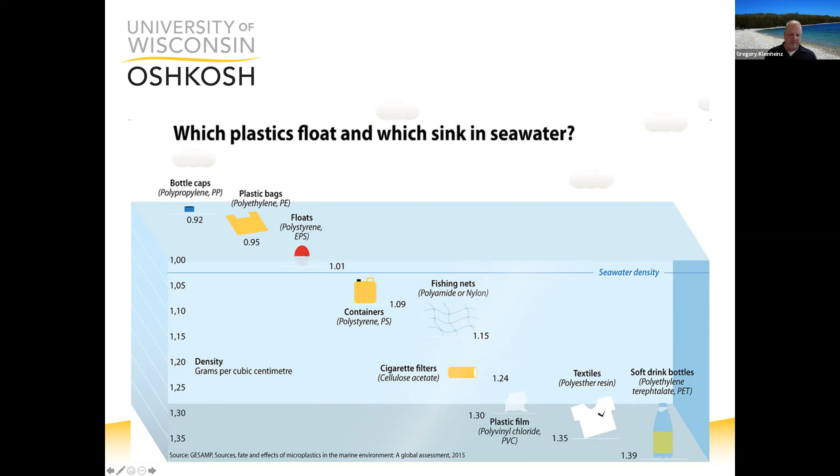Here's seawater, a little over 1, but anything in this area up here, hopefully you can see that, those are the things we see floating. But then a lot of these other materials, even though they're more dense, don't just sink right to the bottom. They're usually floating in some way.

All this bulk plastic then turns, or not all of it, but a lot of it, into what we call secondary microplastics. So we have primary microplastics, things like beads and other emulsifiers that were put into home care products. But a lot of these larger things turn into secondary microplastics, things that break down photochemically, physically, and through freeze-thaw. These are then present in not very visible ways. It's not a water bottle floating.

It's something else. And there's also some other places that we don't always think of it. For example, a nice fleece jacket like this might be made from 22 liter bottles, right? And everybody says, oh, look at the great way of recycling that, which is all true. But it also sheds a tremendous amount of fibers, these small microplastic pieces, and anything that's really 5 millimeters or smaller is considered micro. Those things end up in the water.

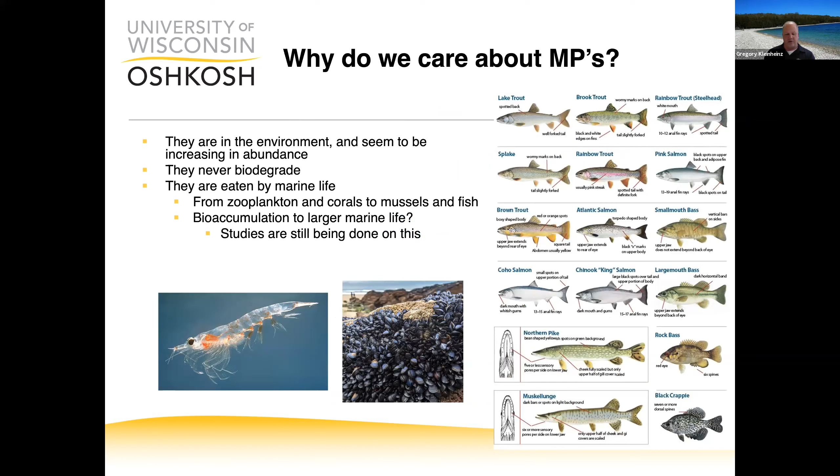You can kind of go on and on about what these microplastics may or may not do, and a lot of it we don't completely understand. We understand they're aesthetically not pleasing. These are plastic, completely synthetic materials that things including humans are ingesting, so it's probably not a good thing, but we really don't understand completely what happens.

We started last year really looking into this, over the last couple of years. In 2019, Adopt a Beach found that 90% of the material they're picking up was plastic, at least partially or fully. It's been estimated 22 million pounds of plastic is deposited in the Great Lakes each year. I found that number astounding when I first heard it, because we've all seen those large gyres of plastic in the news floating around the Indian Ocean or Pacific Ocean, but 22 million pounds every year is a big number for the Great Lakes.

So hopefully we're not at risk of looking that way as well. In our particular case, we've got Door County, which serves as both a physical barrier for trash and debris from the western side, but also from the eastern side along the main lake.

As far as the things we're doing, these are some significant projects. As Teresa said, we're starting an EPA project. We've officially started it, but the field season will start next year. That includes buying a trash boat, purchasing some Seabins for installations at marinas, and I'll show you a little bit more about those in just a second.

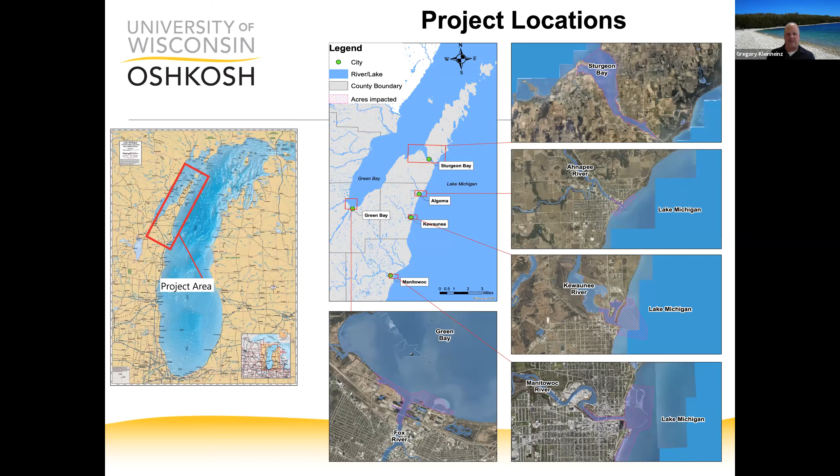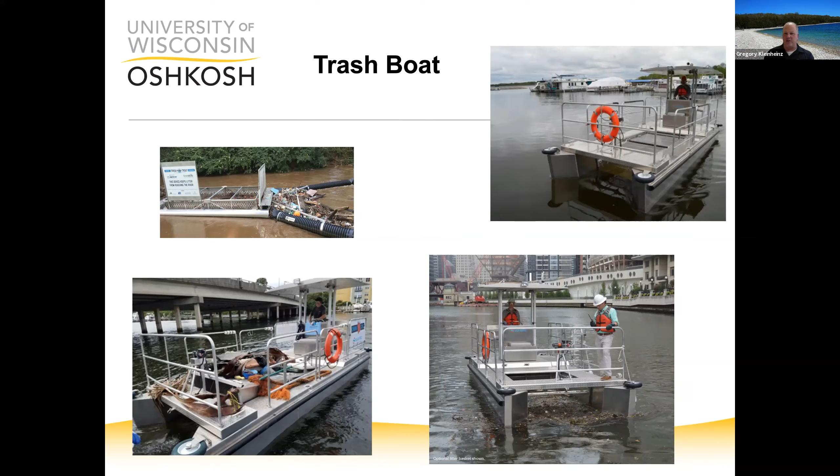The hope would be that it could go on sort of a circuit and visit various marinas and places that we identify as having some accumulation, and hopefully help those places pick that up.

You can see some debris and things being put into the Seabin. They also have a pad in them that will absorb oils and greases that are floating, so that helps a little bit with that as well. And they can remove up to 20 kilograms of debris a day, or as much as you empty it, so it's a fairly significant amount.

Each one of these has the capacity to remove, and for us, either our partners at the marinas will be emptying these, or our students. We have a group of students that work from basically May through the end of August on a circuit around Northeast Wisconsin, and they'll be emptying these as they go by for further characterization.

If somebody's interested in one of those, please reach out to me and we'll see what we can do. I would love to say I could give everyone one, but I have no idea what the demand would be if I say that. So we do have a bunch that we don't have homes for, and they can be mounted to anything.

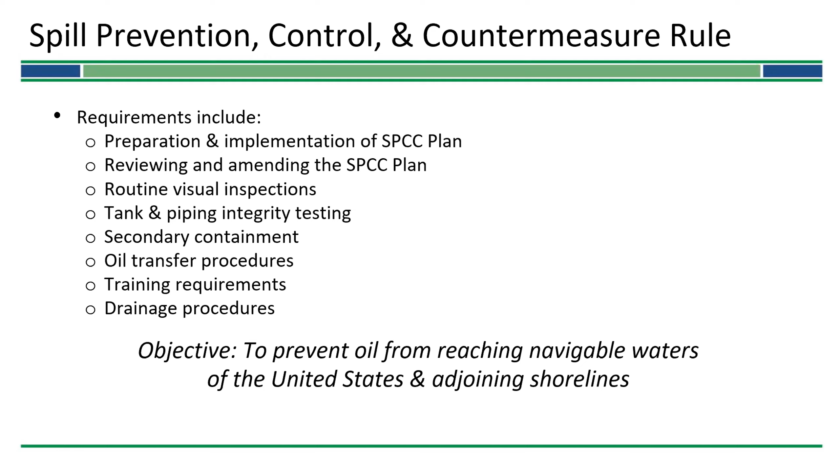This regulation comes from the CFR, a federal regulation whose main purpose is to prevent oil from getting into waters. This is a federal regulation, and your state, Wisconsin, has some very good above ground storage tank regulations of its own. There's some things that are the same and some things that might be different, but at the end of the day, both are trying to prevent oil from reaching a waterway.

This is about the significance of marinas with the regulations. The distance to navigable waters is really important, along with the potential proximity to sensitive ecosystems and the amount of traffic.

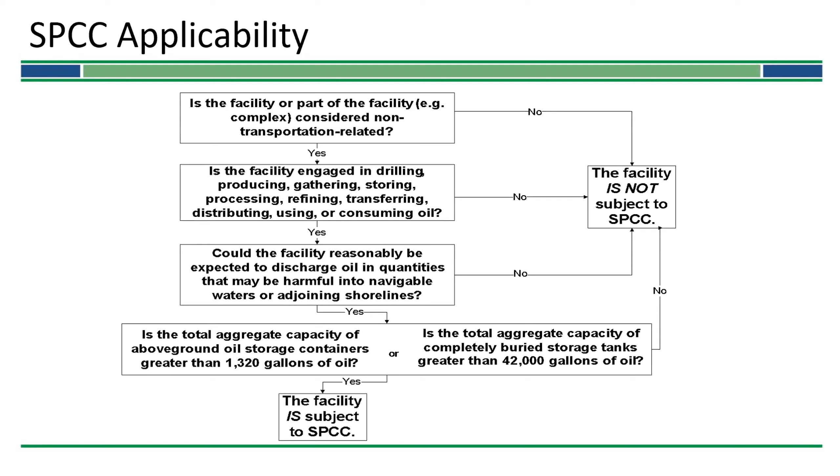This is one of the difficult things sometimes: how do you determine total oil storage? We look at the capacity of a container, not how much you actually store in it, and we only look at containers 55 gallons or greater. So sometimes people say, well, I have 4 drums but I only put 20 gallons in each. We still have to look at all the drums as if they're all 55 gallons. This applies to tanks, drums, totes, anything like that.

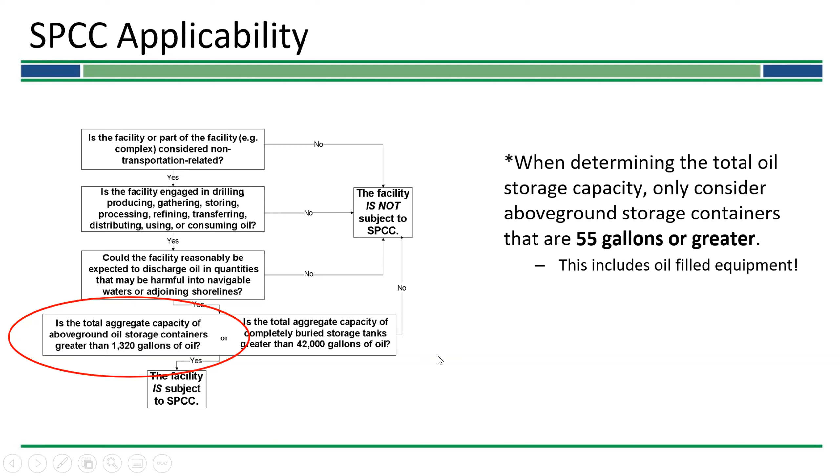This covers who needs to do a plan. One thing we found often is that marinas don't realize they're regulated when we go out and look at it. This gives a brief overview of some things we'll look at further on.

These are some more basics. One requirement is that you need to have a PE sign these very often. That's a common one.

The plan has to be present and available for review at the facility if it's in operation more than 4 hours in a day. The plan must be reviewed and evaluated at least every 5 years, and this has to be written and signed by the facility, whether or not it needs to be amended.

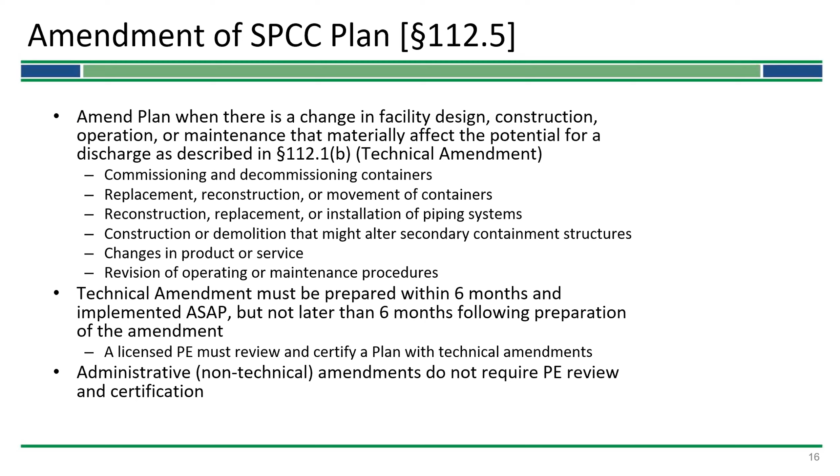For amendments, this tells you when you have to amend the plan. If you have an above ground storage tank and you take it out of service, or put a new one in, those are considered major changes and need a technical amendment, usually signed by a professional engineer, and you have 6 months to do it. Other changes can be made as amendments that don't need to be certified by a PE; you just have to put them in your yearly review.

So here's some core SPCC concepts of things that we look for in a plan.

So secondary containment is one of the major issues that we find, that you have to have minimum secondary containment, sufficient containment for the most likely discharge. They can be passive or active. Passive containment would be sized secondary containment, certain berms, we'll show some other things.

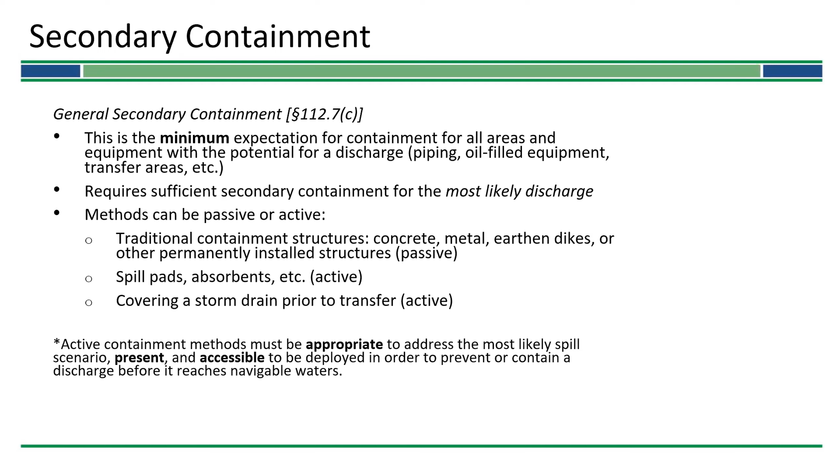Active would be using spill pads or absorbents or covering a storm drain prior to a transfer. A lot of these things are very specific to the kind of tanks you'd have at your facility.

Here's an idea of general secondary containment. So there's a rollover berm. That would be protective during transfer if you're transferring oil into a container or into a truck or some other area, to keep the spill from leaving the property.

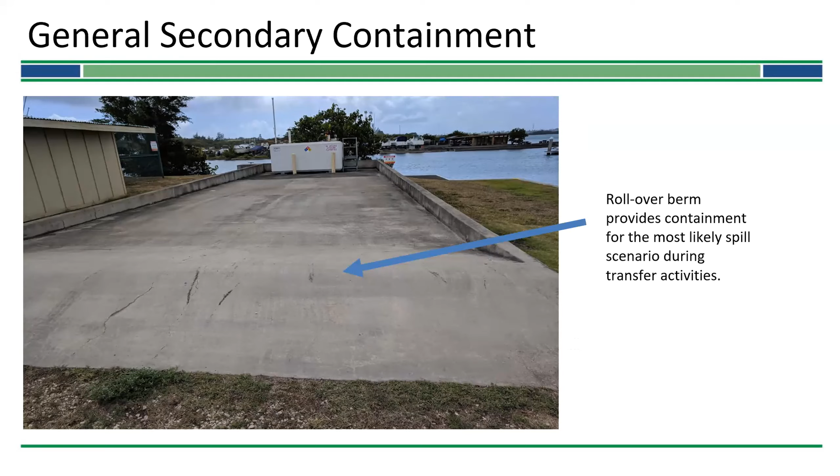Sized secondary containment is what you're going to see for pretty much any storage container greater than 55 gallons. It's more stringent. It requires sufficient volume to contain the largest tank plus allowances for precipitation, so you'd have to look at what kind of rainfall your area gets. You can use a dike structure, retention or drainage ponds, or other drainage systems. A lot of people use double wall tanks for sized secondary containment.

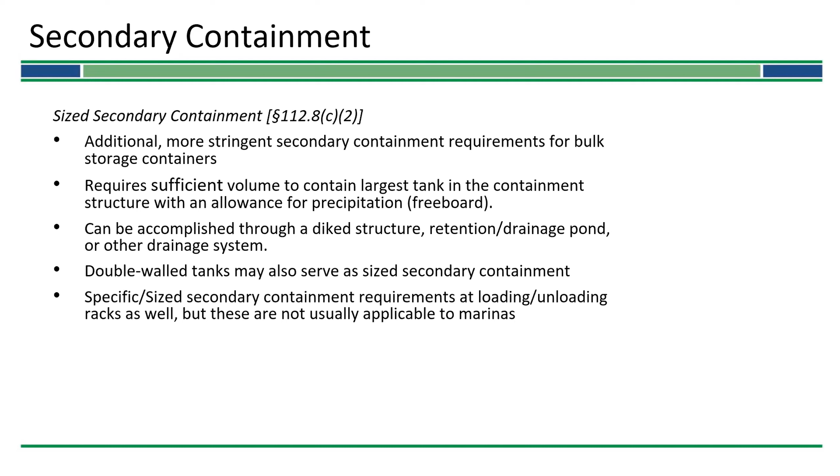There also is sized secondary containment at loading and unloading racks, but we're not seeing a lot of racks at marinas at this point.

Here's adequate containment - this is a double wall marina fuel tank. One of the things is you do have to have some system in place that monitors the interstitial space.

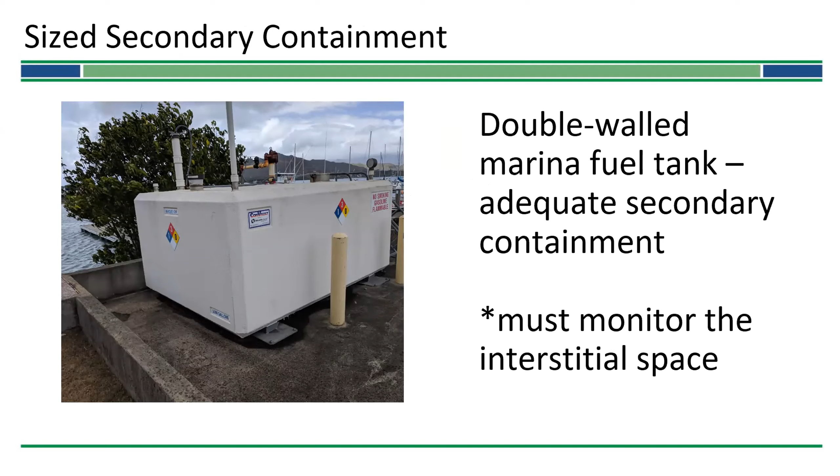Here's an area where we have inadequate secondary containment. This is a tank sitting in there, but you see that the containment area does not have enough area for the whole tank plus precipitation. It would just catch any little minor spills, but it doesn't really meet the regulatory requirements.

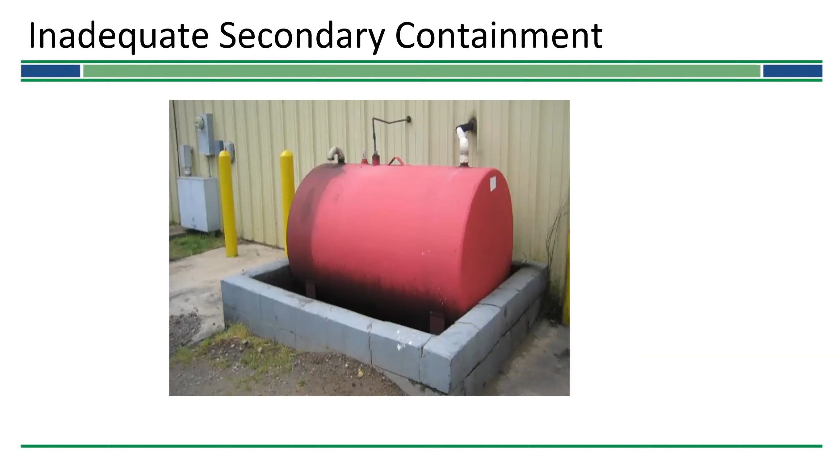One of the other things we have to worry about with containment is drum storage. Drums can't just be sitting on the ground. There has to be some containment for the volume of the largest container. So if it's a 55-gallon drum, you only need 55 gallons of containment, but your drums can't be sitting on the ground - they have to be in some kind of containment that can hold 55 gallons of oil if it were to spill.

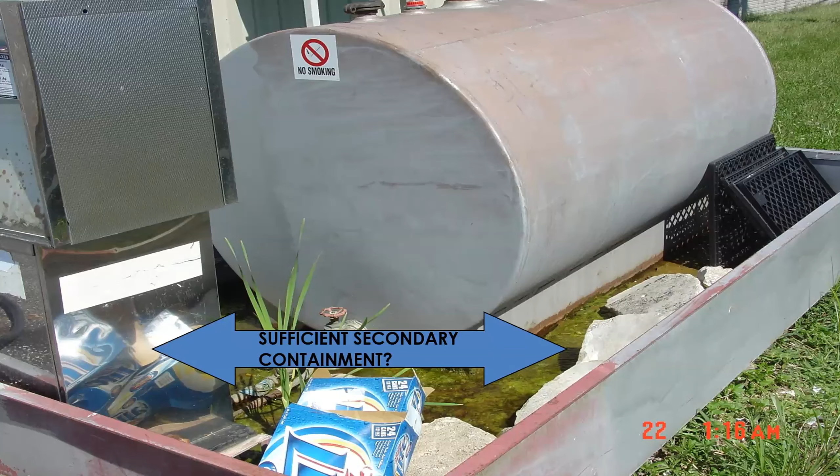So this is one of the things - when we go to look at sufficient containment, you would have to subtract anything that was sitting in there. Even if this were to hold the contents of this tank, which it doesn't appear to, you would have to subtract out the volume of any of these things that are in there. So this would affect your containment.

So your containment area has to be clean of other things. Or when you do your calculation and figure out your containment needs, you have to make sure if something else is going to be in that containment area with it, that it's subtracted out.

So these are some of the things you find in a diked area - you restrain the drainage valves, pumps, what kind of treatment systems do you use. Your presence of oil, and your undiked areas - you want to make sure that in any area not in containment, it's designed so the drainage system will retain and return oil to the facility or some other area so it doesn't leave. Examples would be retention ponds, lagoons, catchment basins, or diversionary systems.

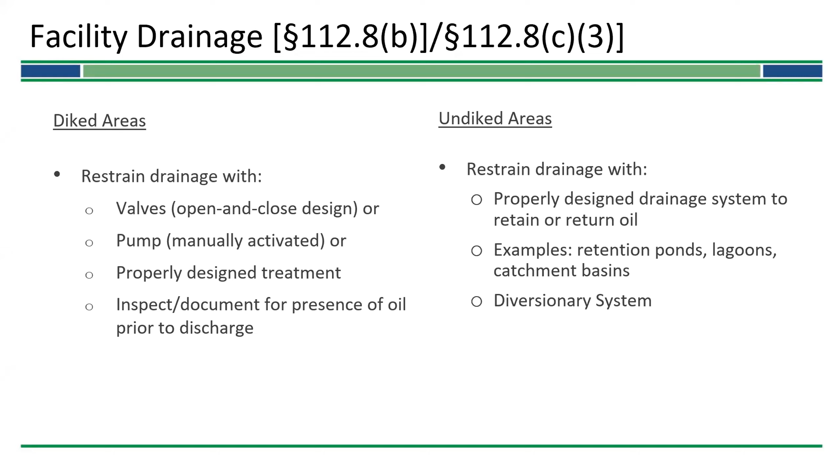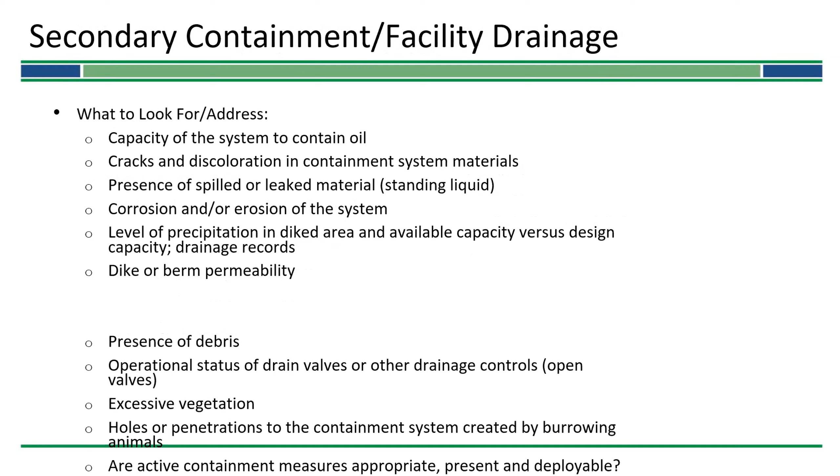So when we're looking at secondary containment, we want to look at all these things. One of the things you see is cracks and discoloration that could affect the integrity of the containment, presence of spilled liquids, presence of debris, excessive vegetation. One of the things we see a lot is excessive vegetation that affects the capacity of the containment, and then holes or any kind of penetrations to the system by animals.

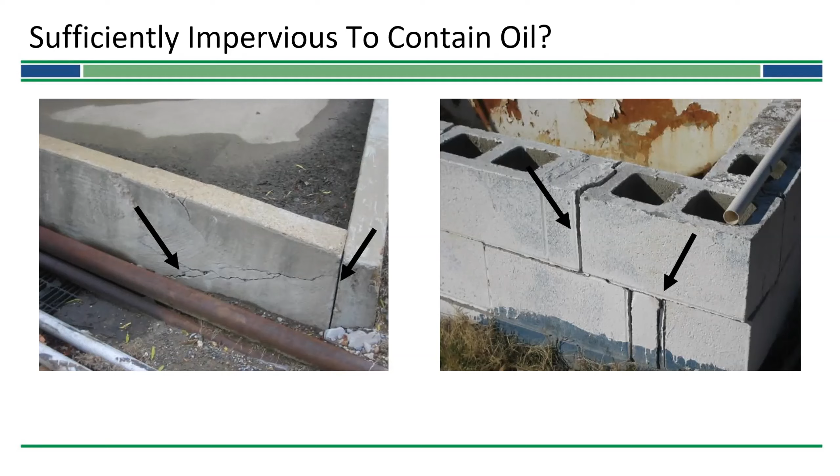Here's a couple of examples of containments that are not sufficient. You see that there's cracks in the containment, or the bricks aren't being held in correctly. These areas are not considered sufficient containment - they're one of the things that we would write up if we were doing an inspection.

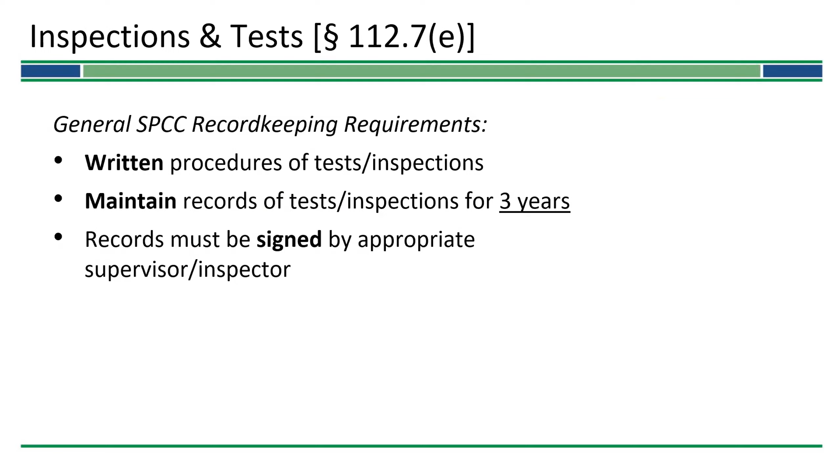SPCC has a lot of record keeping requirements. As part of your SPCC, you have to have a written procedure of the tests and inspections you're going to do. You have to maintain your records for at least 3 years, and they must be signed by an appropriate supervisor or inspector. So in your plan, you have to actually say these records will be signed by an appropriate supervisor or an inspector.

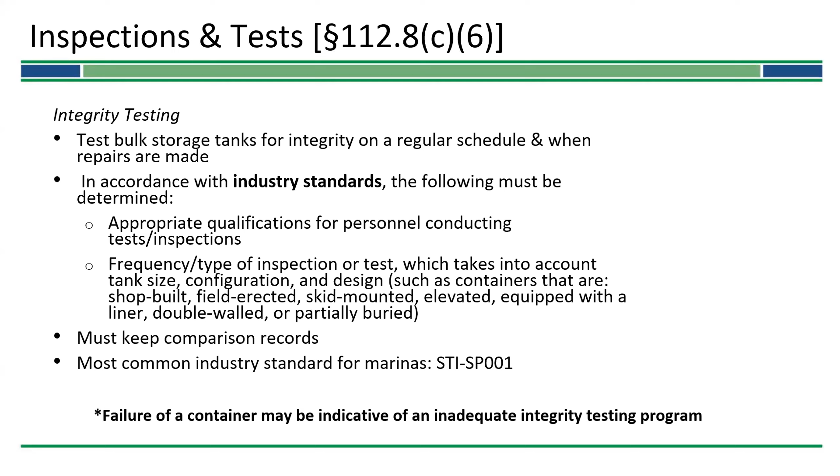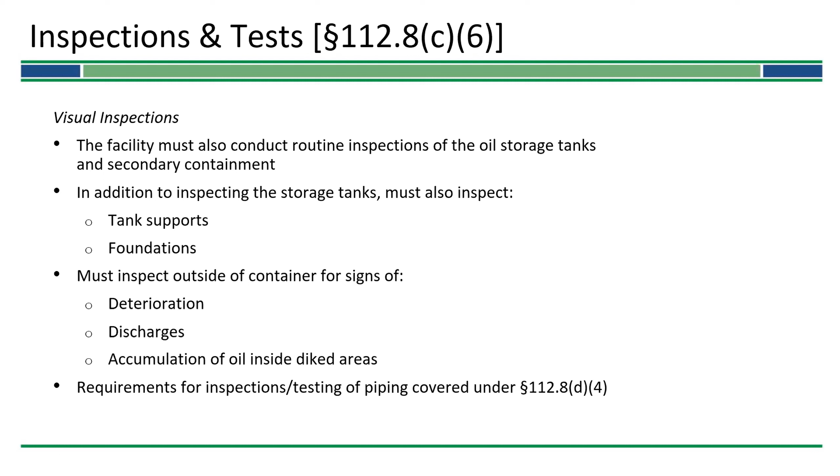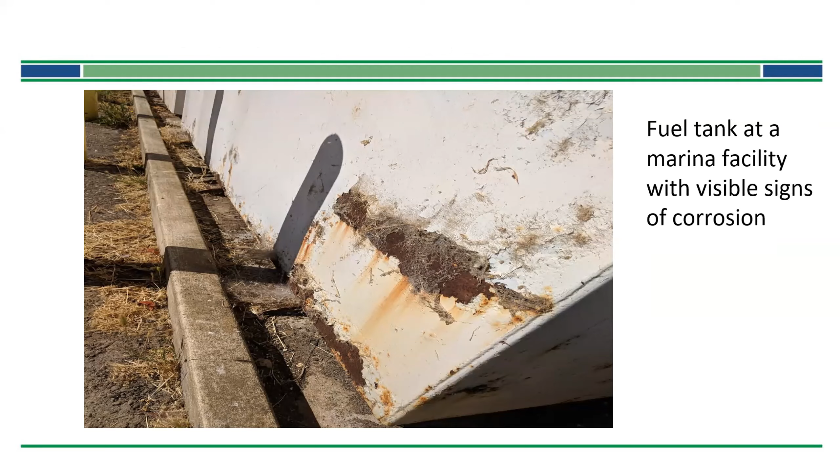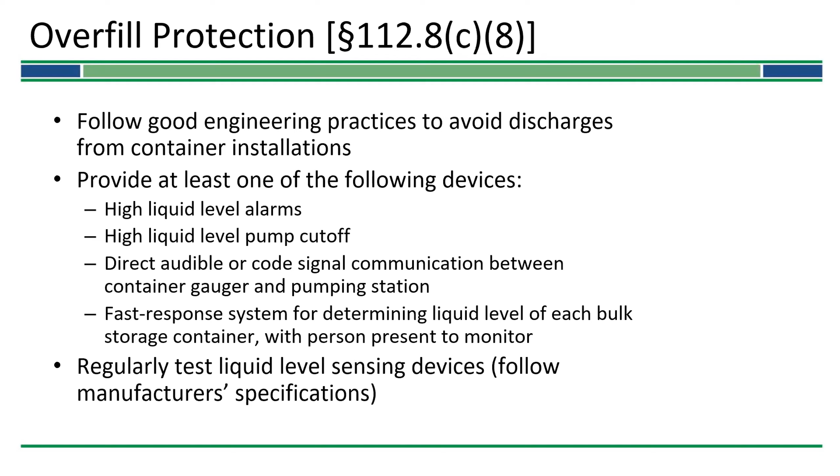Visible oil discharges must be removed promptly. This is another thing where you often see people just leave it for weeks, saying it's not going anywhere, but the regulation requires prompt removal.

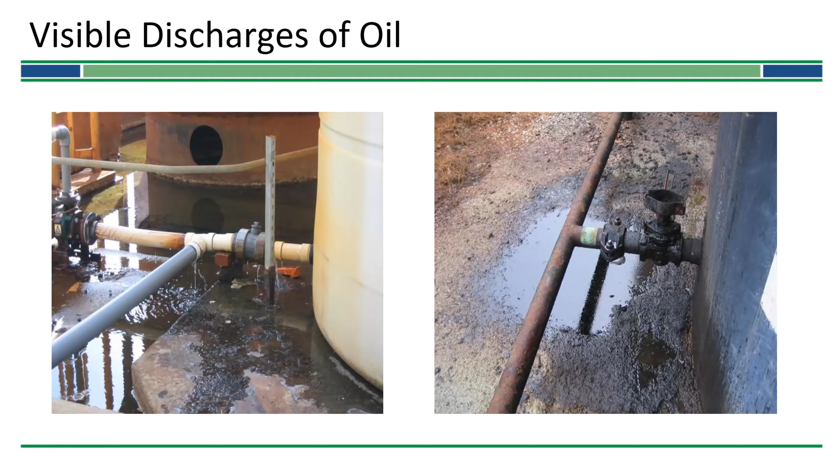Facility security: you want to make sure no one gets unauthorized access to the oil handling areas, to deter vandalism and promote safe operations. You need certain lighting, and your drains have to be locked unless the people using them are authorized to do so.

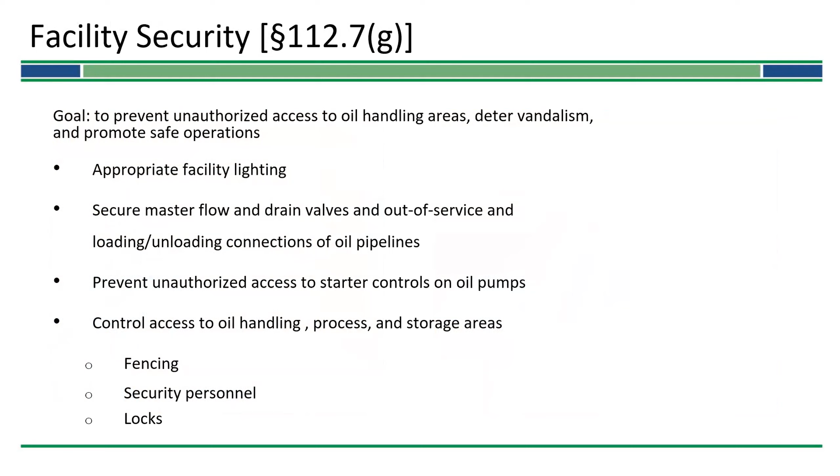Training: we have to train the oil handling personnel. One thing we often see missing is training on the plan itself. Training happens at least once a year, but it's more than just training people to respond to spills. You have to make sure they know you have an SPCC plan, what's in it, and that they're aware of it. A lot of times there's yearly training for employees on spill response, but they don't necessarily know they have a plan they're supposed to be looking at.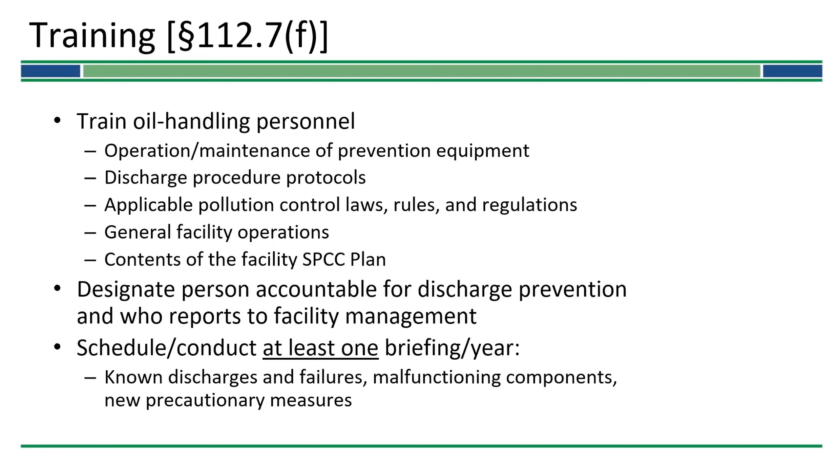This is one of the things too that's really important to our regulation: reporting spills. You must report an oil spill to the National Response Center. If the spill is to a waterway or adjoining shoreline, a water quality standard could be violated - it causes a sheen or discoloration, or causes a sludge or emulsion. The number one thing we see is usually a sheen, and if a sheen is visible, this is where you call the NRC. That's who you report to.

The only time you have to report to EPA directly to the regional administrator is if you have more than 1,000 gallons in a single discharge, or if you have two 42-gallon discharges within a 12-month period. You must report that to the EPA within 60 days of the incident - that would be a letter you would send to the regional administrator. Otherwise, if it's a small spill, again, it goes to the NRC.

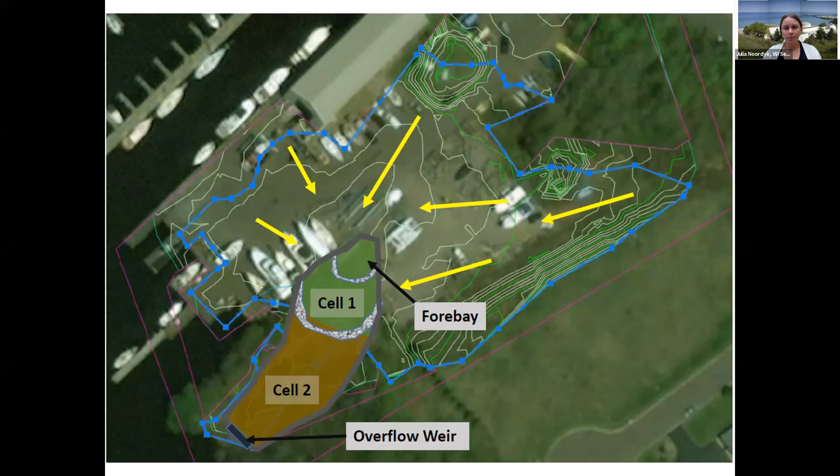So I'm going to turn it over to Eric to let him talk about the whole process and the practice. This is the before picture. Take it away, Eric.

Thank you, Julia. Some years ago, Julia and Teresa showed up at my door and said, we have money and we want to build green infrastructure. I said, well, glad you came by. I pointed to an area behind a grove of trees, which was really the last bit of unmolested real estate on our leased property. We're a privately run business that leases a marina from the city of Superior. We've leased the facility for 40 years since it opened in 1980. The relationship between us and the city is very hands-off; we do our thing and pay rent, and occasionally we reach out to the city for infrastructure support. This area was sand and not great for storing things because it was soft, often wet and spongy, and led into a natural wetland to the left of this photograph.

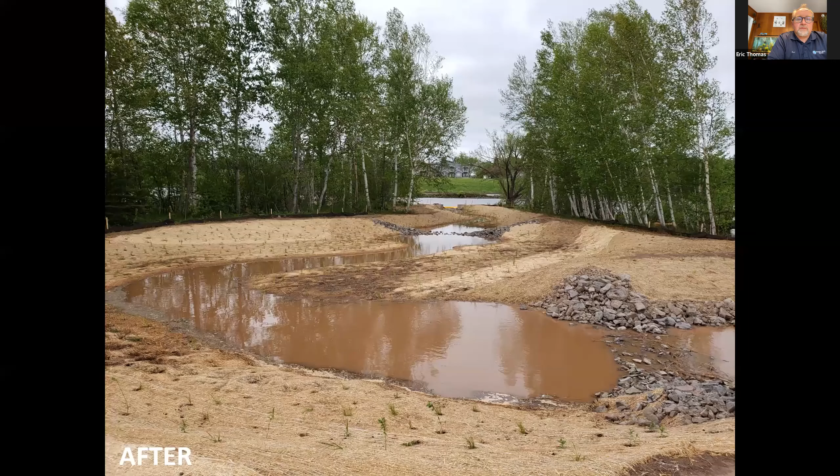Next slide. Can you click over for me, Julia? I don't know what's going on. There we go. Sorry, delay. Here we go.

So this is what it became, and this is literally a photo of the day they finished. Ohio State University, as part of this Great Lakes grant, was doing design and engineering. They surveyed the property and came up with the idea of this linear wetland. What you see here in the foreground is the second of 3 cells. To the right, you can just barely see it, but there's a waterfall of rock.

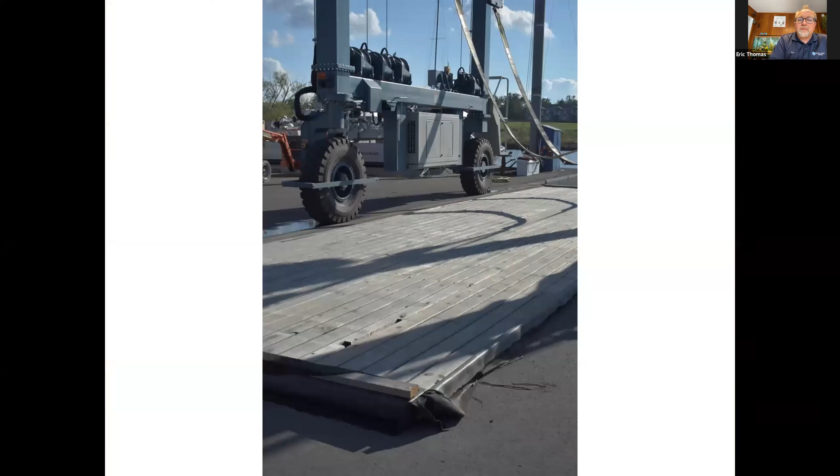Another big impact that we as a marina have on the waterways is the power washing of boats. It's a seasonal thing - when they come out of the water in the fall, they're covered with slime and algae. In our neck of the woods, any surface of a boat that's not painted with a toxin is covered in zebra mussels. So we're power washing 500 boats a year.

And that, up until 2 years ago, was literally direct discharge back into the lake. The practices of most marinas are to wash them close to the water so the mess can get washed away easily. That's a tough legacy to live up to, but that's what we were all doing. It bugged my staff that they were walking through 3 inches of muck to get to projects, and the muck stuck around for a long time.

So what we did, after trying to figure out how to build a good wash basin and catch the algae, the slime, the bottom paint residue - that being mostly laden with copper or zinc - was to take a number of water samples when we were washing boats to figure out what we'd be sending downstream to our local water treatment facility. We had those tested, got heavy metal contents, and calculated volumes so we could speak intelligently to the pre-treatment resource folks at the water treatment plant. We had to do this for both our facility in Minnesota, and then we brought it and did it here at our facility in Wisconsin.